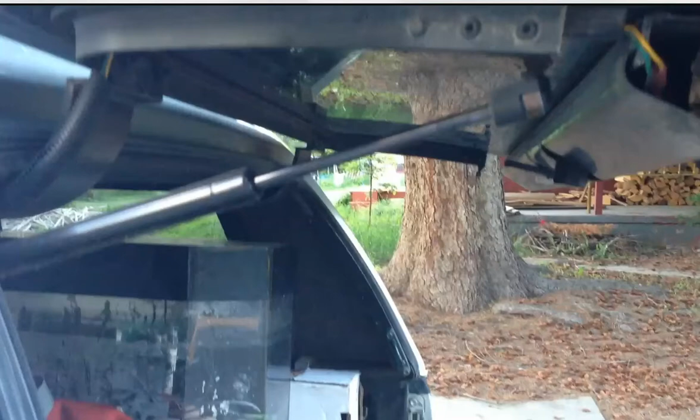So today we're going to be exploring my Tacoma, my Toyota Tacoma. Here we're looking at the back, the lift gate on it, and we're going to be able to find all sorts of reaction points or types of reaction points on the Tacoma.

The first one I'd like to quickly take a look at is this shock absorber right here. I use it to hold up the lift gate. The other one actually broke the other day, but this one holds up the lift gate. We're going to play it and just watch it go back and forth.

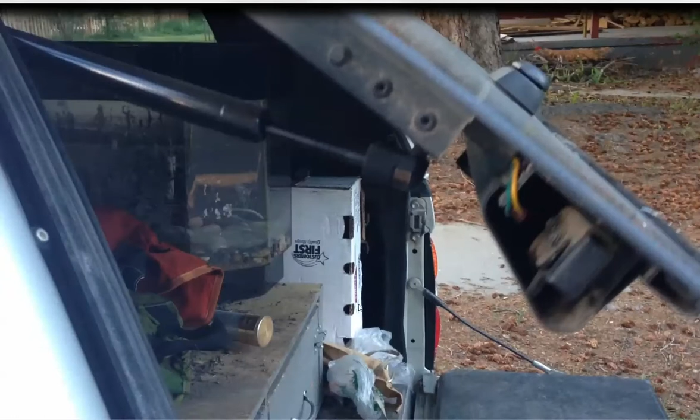It's closing. Now one of the things you'll notice here is this is kind of like a pinned end. It's pinned in 3 dimensions. It's a ball and socket joint, and that just means that there's no torque generated here. What we have is this shock only resists force along its axis. It doesn't resist force this way. There's no rotational force that it resists. It only resists force in this direction, which means basically the way we say it is, it has a reaction, and we know its direction, and we can figure out its quantity, of course.

So there it is, going up and down, and as we go up and down, let's watch that again. Here it is. It's pushing in, pushing out.

So it begs the question, in that case we have one force, we know its direction. But interestingly, you might think that because it's preventing something from rotating, that it itself is applying some sort of torque, but it's not. It's only applying a force.

These are some of the cases where at first glance it looks like one thing, but later on as you look at it more carefully, you realize that something else is happening. Let's take a look at this carefully. First things first, in 3 dimensions, a force acting in one direction, or in a direction that we know.

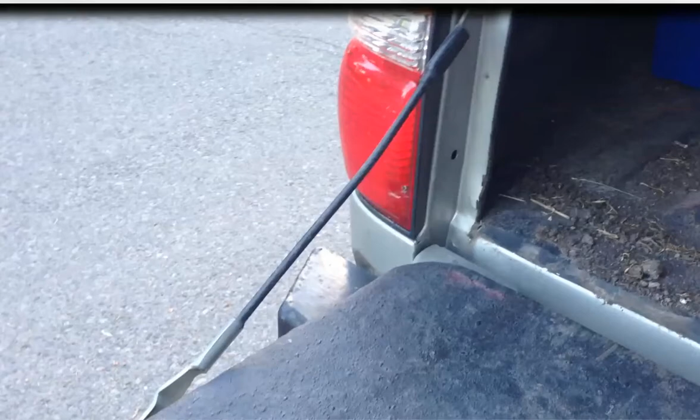Let's take a look at some examples. Here we are, again on my truck. Cable. Once again, we have the lift gate is rotating, but what's stopping it is not anything causing rotation. It's just this cable, and the only force it's applying is along the direction of travel. You can see it snap.

The next item looks totally different, but it's the exact same concept. Here we have a wheel rolling. The only force is the force supporting it. We saw this in our last video. Here, let's try that again. There you go. The only force is going straight up. Nothing stopping it. One force, known direction.

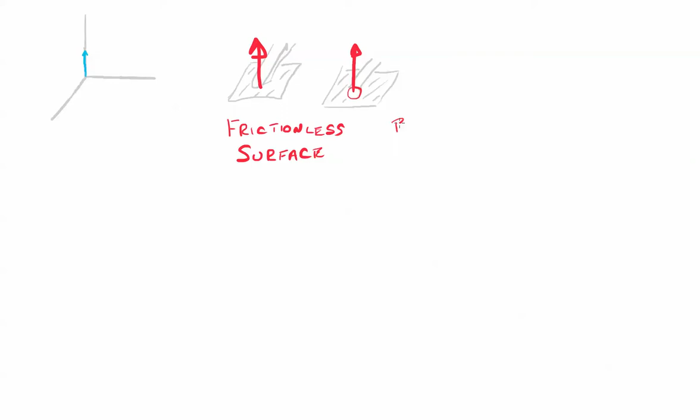Let's find another one. All right, here's a couple that I've drawn out. The first one on the left, this is in 3 dimensions, a frictionless surface. So you can imagine that in 3 dimensions as well as 2, the only force that's happening is force straight up. In addition, you have here a ball, so you can imagine some sort of rod that has a ball recessed into it, and the ball rotates freely, so it can travel horizontally. But the one thing it does is it has a reaction force straight up.

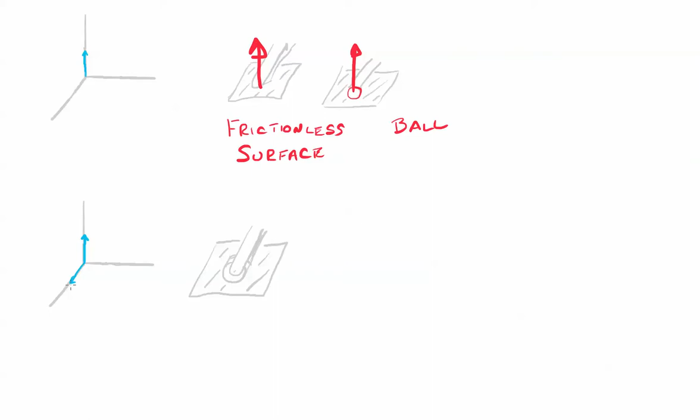Let's take a look at the second type of reaction point. Here we have a vertical force, and we have a force going in the z direction coming towards us. Now it just means it could be going in the horizontal direction too. The point is that you have 2 forces, or a force acting in an unknown direction. Now we saw the wheel earlier that was rolling freely. If we had just put on the brakes, that would be a force in an unknown direction, because now you have a horizontal force as well as a vertical one.

Another way to look at it is, let's take a look at this roller, okay? The roller is pushing up. In addition, if you were to push right into us, say like in this direction, into us, the roller has traction.

So it's going to try and prevent going sideways. This is one way that looking at things in 3D is a little different than in 2D, because a roller here doesn't want to go sideways. Now, as a caveat, keep in mind that we look at the way a part is generally designed to be used. If you're careful, you'll notice the roller also prevents rotation in this direction. Yeah, you're right, but a wheel is not designed to do that.

So when we go through all these steps, some parts in practice may limit certain types of reaction, or may limit the overall way something is moving, but that's not what it's designed for, it's not its primary function. So we simply say that it does not offer a reaction in that case. In this case, we are saying that a roller is two forces.

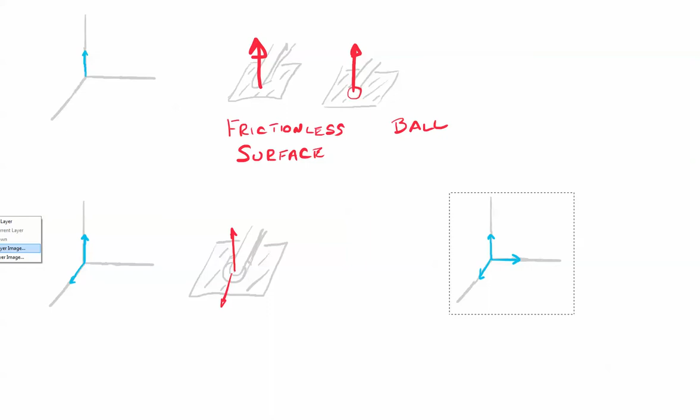Let's go ahead and insert the perfect example of that, simply a tire. In this case, with a tire, we are going to restrict the force going vertical. There's going to be a reaction going this way, and a reaction going this way. And if you insist on pushing it sideways, there will also be a reaction this way. It's just sitting there, like anything on a rough surface. So that rough surface would look like the other one right up there. Let's see if we can provide that. There you go, it looks the same as the frictionless surface, but you'd say rough surface.

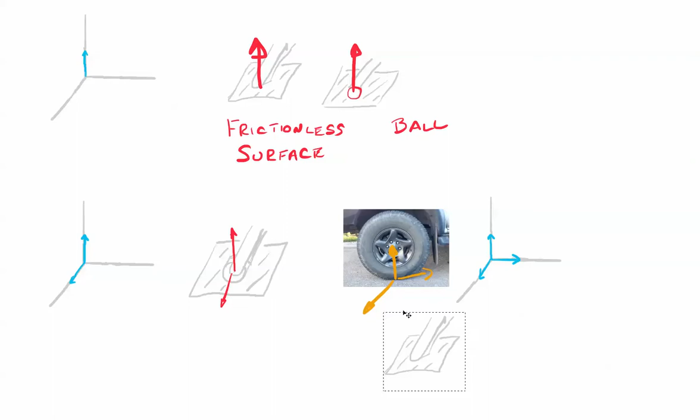So there's another example. Let's add some torques now to this. Let's bring up our axes and take a look at what that would mean. Here we go, we're going to have a reaction force vertically, towards us horizontally, and we're also going to have a reaction force in this direction. Now, what would that look like?

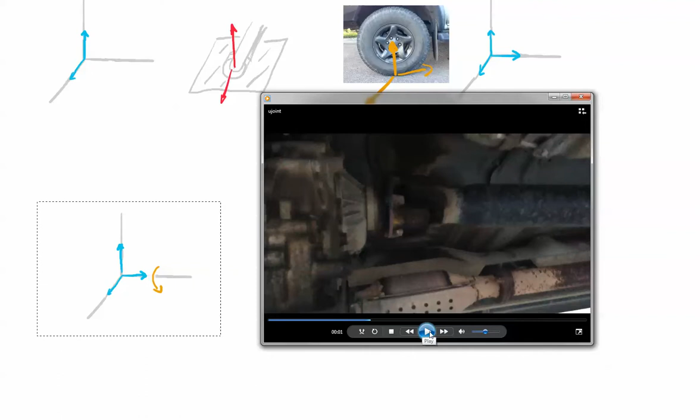Here we have an example of one, a U-joint. This is my transmission, this is the shaft that goes to my rear wheels, and you'll notice something funky going on here. We'll bring up another video that looks at it more carefully. But what it allows me to do is support the shaft as it rotates, while also allowing the shaft to move in the vertical and horizontal directions. We're just going to take a look at it as it rotates.

Let's try this again. So in this case, we can see that the motor is driving the shaft. That's what's happening here, that's the reaction.

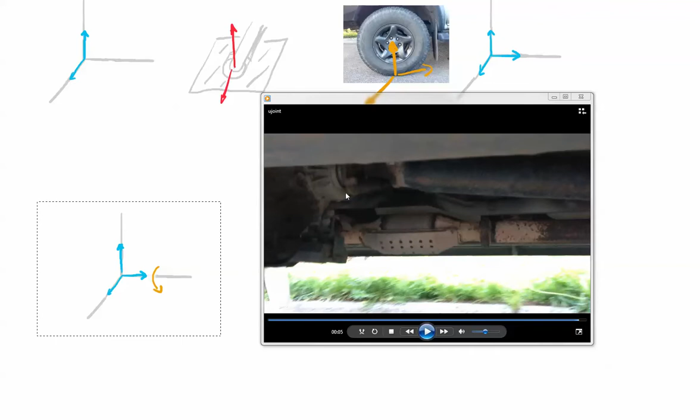Let's take a look at something that will clarify it so we can see it really in action. Here I've pulled up a socket set that I have, and I'm rotating these so you can see what's happening.

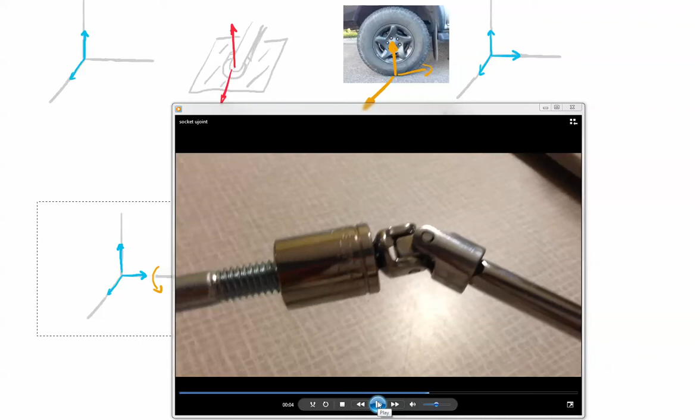So this is rotating, and that rotation is being shifted here. You'll notice I can move this socket this way, in this direction—I can rotate the socket in other dimensions, but I can't rotate it to tighten or loosen the nut without rotating this part. It's constrained. I'd suggest looking on YouTube for some neat videos of U-joints—universal joints is what they're technically called, though everyone calls them U-joints. This is an example of forces acting in 3 directions with 1 torque being applied.

The next item I want to put down here is a bearing. Now this bearing is special. It allows rotation, so there's not going to be any reaction regarding the torque. In addition, the rod can slide back and forth in this bearing, so it's not going to have any force in the horizontal direction.

Go ahead and put it on pause for a moment and see if you can figure out what the reactions are that it exercises on the system. All set? Last chance. Here we go.

In this situation, it has a reaction in this direction, coming towards us, and you see that here. You can imagine if you're looking at the joint that it's going to push up, transmitting the force through the rod. It can also push sideways in this direction.

If you try rotating the whole setup, it will have a reaction this way, coming towards us. But if we want to rotate it like this, we're not going to be able to — that bearing keeps that from happening. In like manner, if you try rotating it in this other direction, it's not going to allow it; there's going to be a reaction there. So this is a case where we have two forces, two torques.

Right here I have my sun visor. Now it's certainly not a bearing, but because it's on this pin, it rotates in that direction freely, so there's no reaction rotating. In addition, I have this extender, which allows no reaction pushing in this direction — in other words, it can move there.

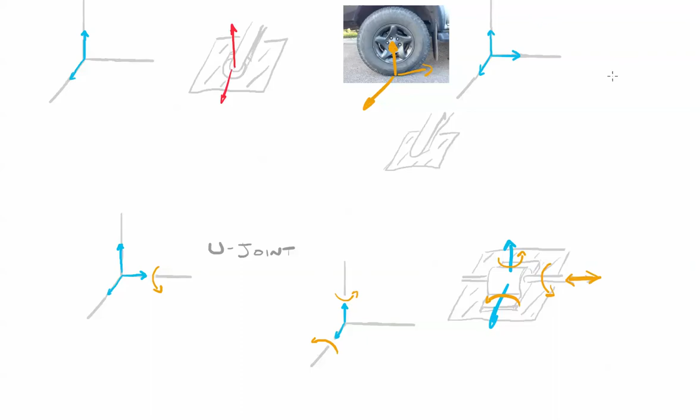Let's take a look at what we have. So we have pushing in and out, so we have no force reaction there. And we also allow rotation, so there's no reaction there. So this is a case where we have two forces and two torques.

The next item is three forces and two torques. Here, the only thing we're allowing to happen is rotation. There's a reaction force here, reaction force here, reaction force here. An example of this would be a pinned hinge. You're not going to allow force in this direction, force coming towards you, or force going up — in other words, there's going to be a reaction there.

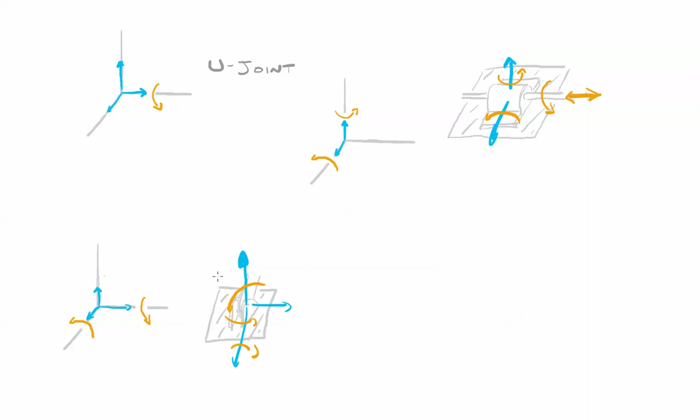In like manner, this will not allow a rotation here, and it won't allow a rotation here, but because of this pin, it will allow this whole thing to rotate, so there won't be any reaction there. One example of this is a door hinge. Here's a picture of our door hinge, supported in every direction. It does allow rotation. Let's take a look at a video of it.

Okay, let's try watching that again. Here it is. You can see it just rotating along there.

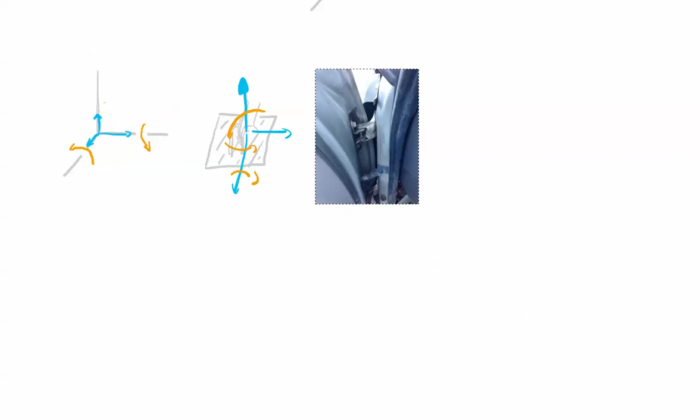We'll scroll down for our final example, which is a fully fixed support. For effect, I've put in the same antenna because it works in 3 dimensions just as well. Here we can see that we are offering reactions vertically, horizontally, and towards us.

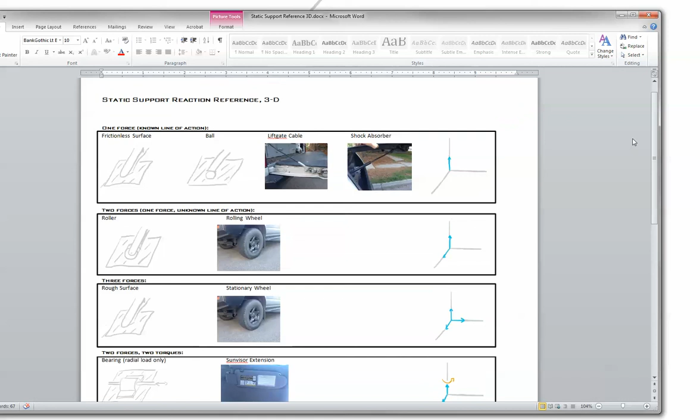Finally, let me show you what I've developed for reference. This is a Word document, but I'll have the PDF version available for you online, so you can take a look at examples of different reactions and how they work as you hit your problems. We'll probably get to explore some of these on our next problem. I hope that helps you out, and I look forward to seeing you then.

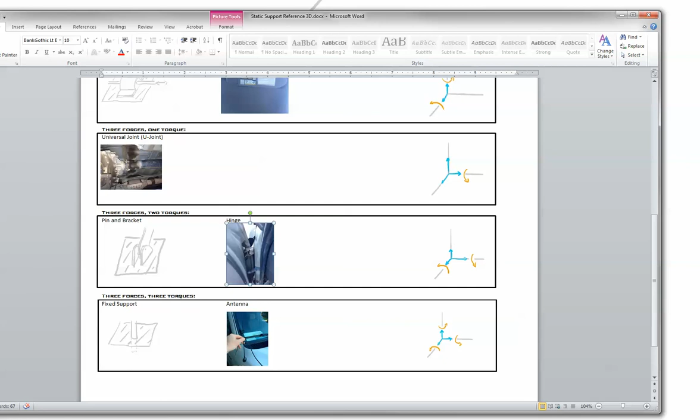I should make a quick note that there are tons of these out there, so just keep your eye out. These are some of the most common ones, and we'll learn about more later on. Thank you.